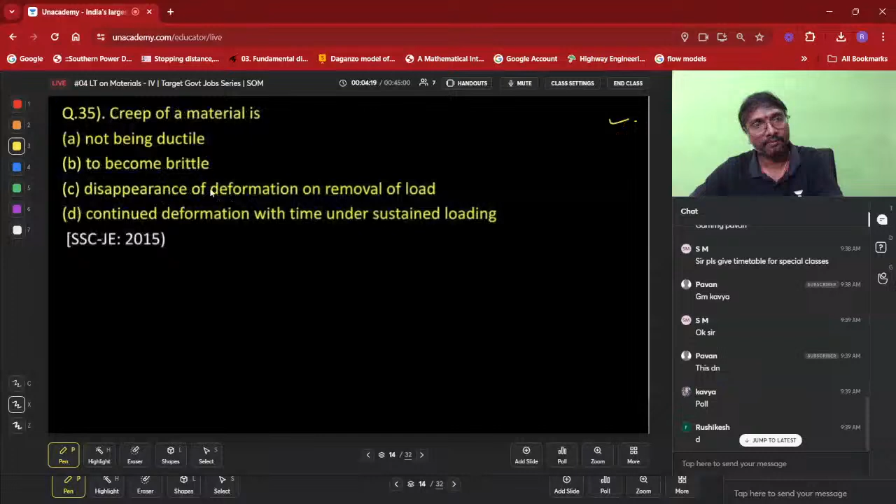So continuous deformation under sustained loading, yes correct, right? So 36th question we will go for. Shall we go for this 36th question, everyone? So we'll go for this 36th question.

Select the answer now. Okay, one second, 30 seconds time I am giving. Select the answer, everyone.

Vaishali, Kavya, Venkatesh, SM, Pavan answered correctly. Anuj from YouTube answered correctly. Yeah.

So what is it? Which of the following is relatively a ductile material: high carbon steel, medium mild steel, cast iron and bronze? Which one you can say is relatively ductile material among all of them? Obviously, isn't it? Now, so next one, right?

Shall I go over to the next question out of here? Select the answer, everyone. Yeah, namaste Aravind. Mild steel, namaste. Okay.

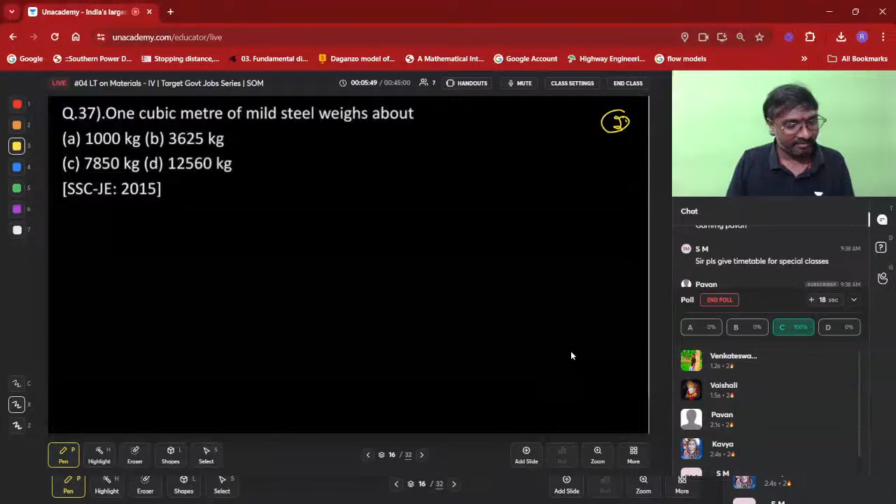Anuj answered correctly. Aravind also answered correctly from YouTube. Venkatesh, Vaishali, Pavan, Kavya, SM answered correctly from Special.

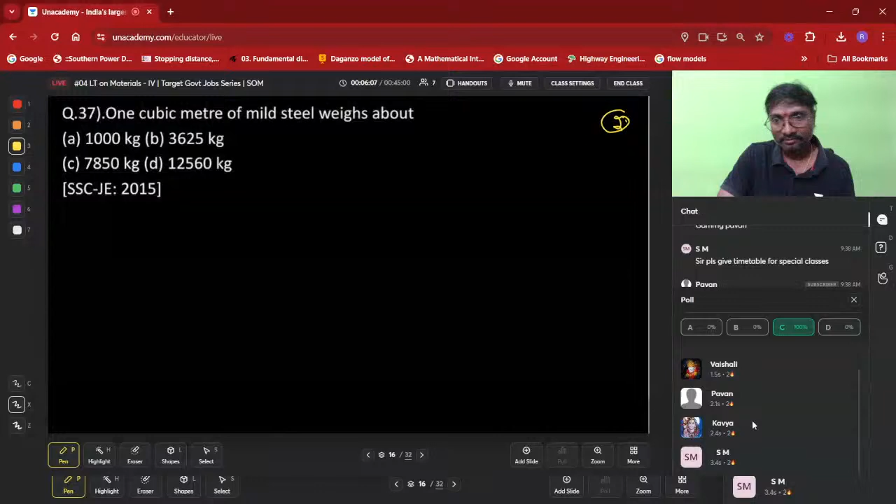Okay, 1 cubic meter of this mild steel weighs about, right? What is it? 1 cubic meter of this?

So I am trying in movies. That's why I am going for an audition.

So mild steel weighs about which one? This is 7850 kg, right? Yes or no, 7850 kg or not? That is your density. So 7850 kg, that rho is nothing but your density. This is 7850 kg per meter cube.

Two subjects means, right. One is highway going on, one is strength of materials going on. But in the highway, that GATE and ESE civil goal is there. In that goal, I am doing GATE questions, ESE questions, state exams, and SSC JE questions. All questions I am doing. And this time only SSC JE and state level questions I am doing. So both are covering all examinations, right?

So 7850 kg per meter cube, or you can also write it as 7.85 gram per cc. 7.85 gram per cc or not, right? You can select it, right?

Now 38th question, shall we go for everyone? Select your answer. 30 seconds time I am giving.

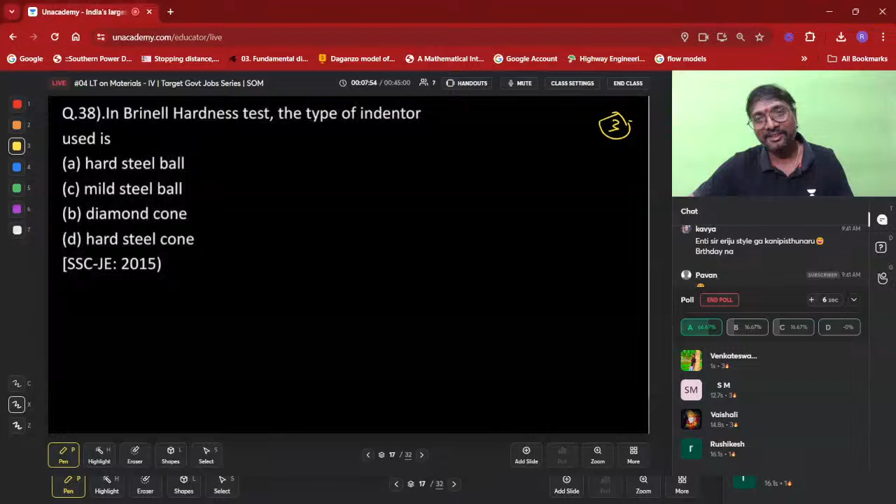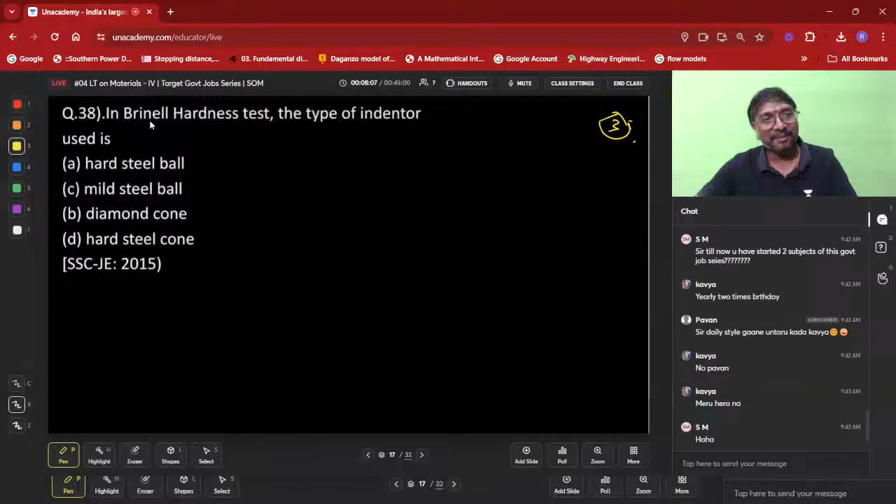Okay, right, this is the leaderboard you are having. You can say in Brinell hardness test, the type of indenter used is, right. The type of indenter used is which one? Brinell hardness test and Rockwell hardness test. Do you remember? These are the hardness tests, you can say.

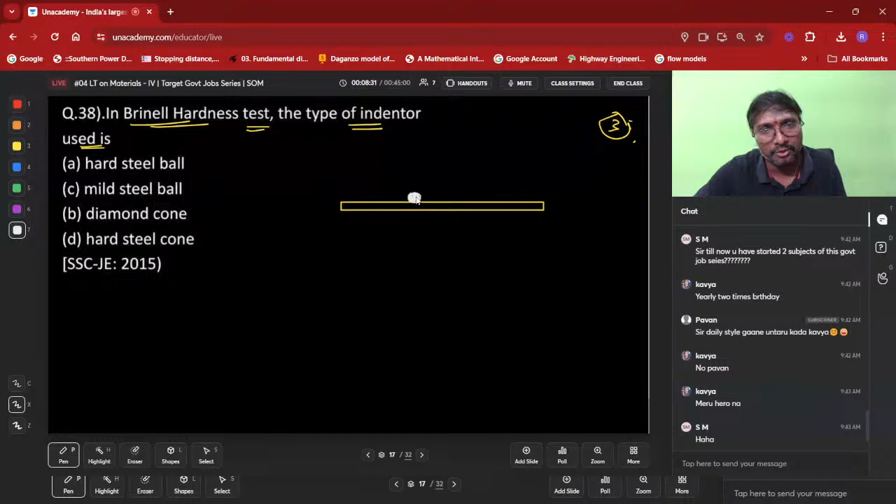So here if you just observe, this is your plate you are having. For this plate, what is it? This kind of spherical ball we are using, or not everyone? So whenever you are using this spherical ball, what is that we will be getting? Depression will be getting like this, na? Some kind of circular depression will be getting. So this is your hard steel ball, right?

Hard steel ball. If you are using this mild steel ball, what will happen? So if that plate is stronger, there is a possibility that ball gets damaged. No, ball should not get damaged, and which one should be subjected to this impression? That plate. So it should be very hard steel ball, definitely, right?

And what is that, Brinell hardness number, you can say yes. So what is the Brinell hardness number equal to? P by surface area, that load, right? Whatever load you are applying, load divided by surface area will be measuring. For this depression, if you just observe, we can measure this surface area or not? We can measure this surface area, you can get it, is it not? So that is your hard steel ball for this Brinell hardness. Yes, correct, right?

So Rockwell, what is that? Tell me. Diamond. But actually in practical, do you use the diamond, or we don't use the diamond mostly, right? That is costly, na? So for Rockwell, we have to use this diamond, but we don't use it. Okay, right, got it? Clear?

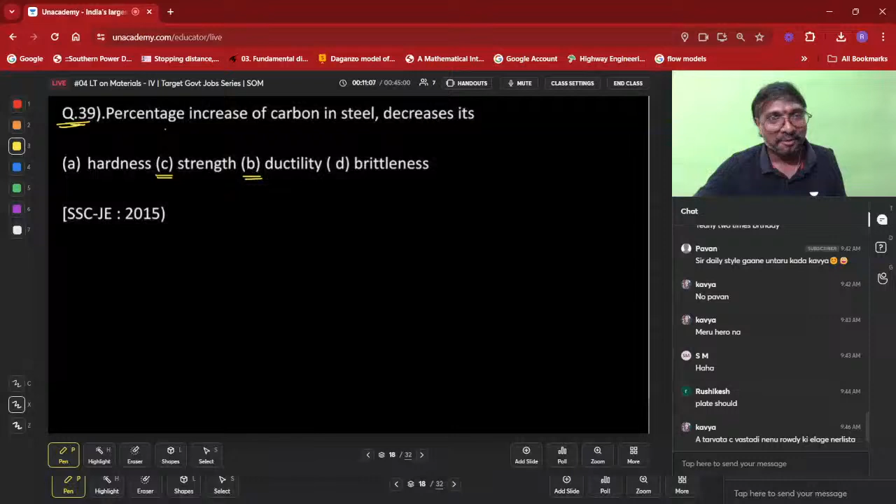Percentage increase of carbon in steel decreases its, right? As this carbon content increases, what will happen? Tell me, strength increases or strength decreases, you can say. Strength increases, na? Strength increases. And what about this ductility, you can say, if you just observe.

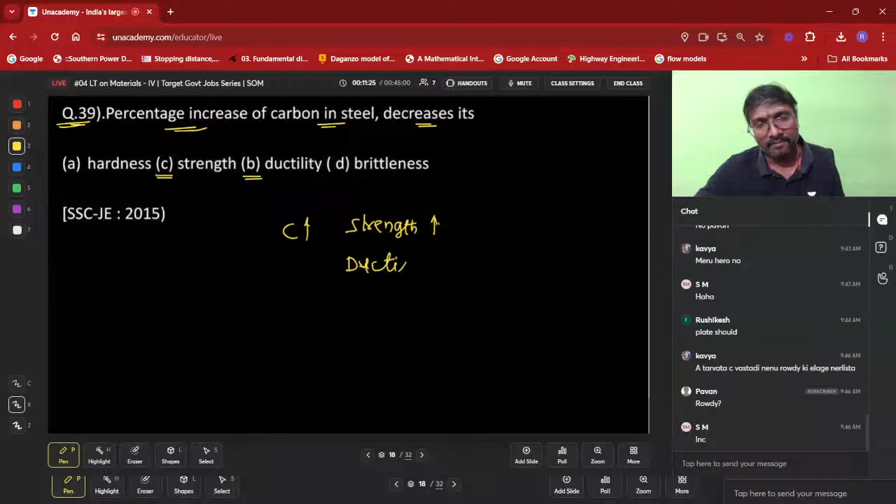What about ductility? Ductility decreases. So what happens to brittleness? Brittleness increases, right? And hardness, what happens to that? Hardness also increases, right? And what else will be there? Tell me.

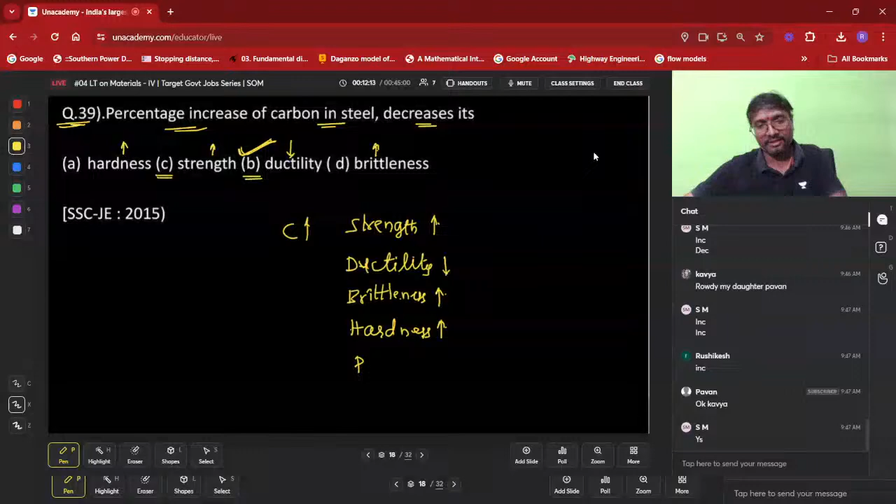Ductility decreases means automatically plastic deformation decreases, right? So as carbon content increases, hardness increases, strength increases, brittleness increases, and ductility only decreases. So which one is it? Option B is the correct answer, you can say it like that. Now shall I move to the next one, the 40th question?

Select your answer. Yes, correct everyone, YouTube and special, everybody answered correctly. Almost 90 plus questions are there in the first chapter itself, previous SSC JE questions, okay? Venkatesh, Rishikesh, SM answered correctly. Don't scold yourself, aspirant, right? Forget values, very good. Venkatesh first, SM second, Vaishali third, right?

Which of the following materials is expected to have the least value of Young's modulus of elasticity? Wood, glass, copper, aluminum, right?

Which one? Young's modulus is least for wood only, no? Because it is the least elastic, isn't it? You wanted me to write these values? Okay, I'll write it at the end, don't worry. Now, because why do we both look similar? We both look similar, okay.

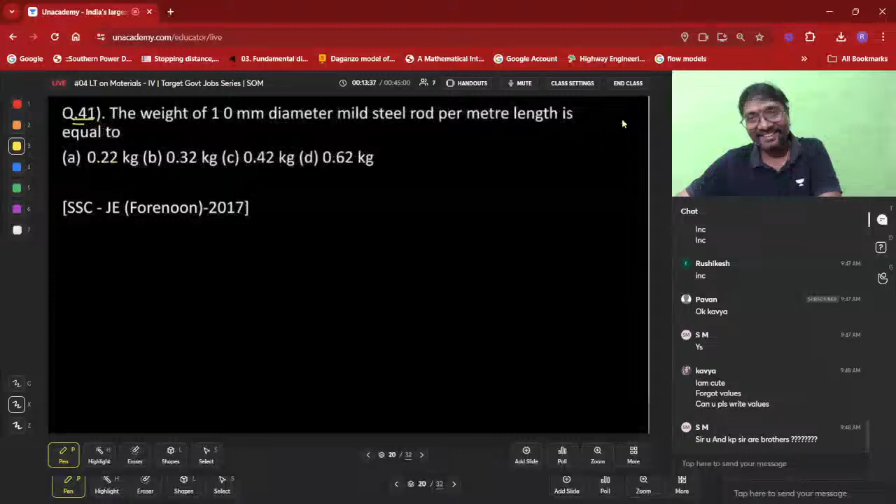Right, so you can call this the 41st question. If you just observe it, I'll be going for this next one. Select the answer.

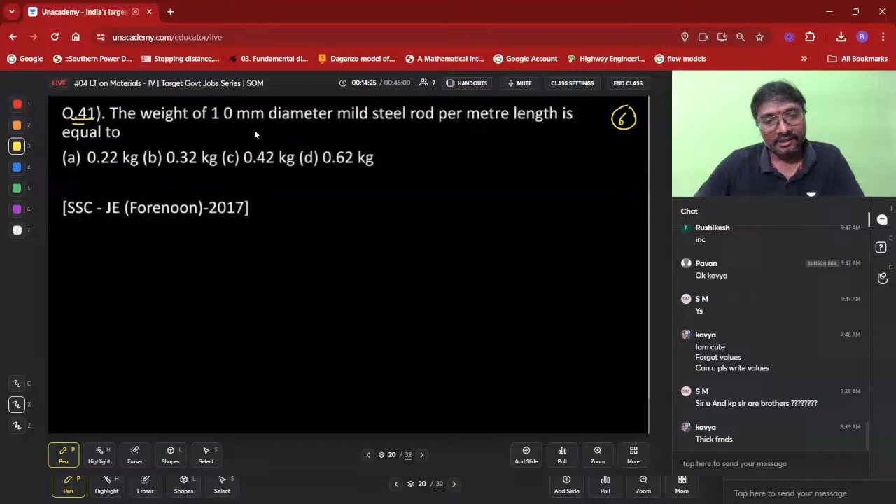Right, this is the leaderboard. Yes, correct. Should I increase it here? I think okay, timer not sufficient or sufficient?

The weight of this, which one? The weight of a 10 millimeter diameter mild steel rod per meter length is equal to, right? Per meter length, what is it? So there are two ways of solving it. What is it? One way, you can say weight is equal to density into volume.

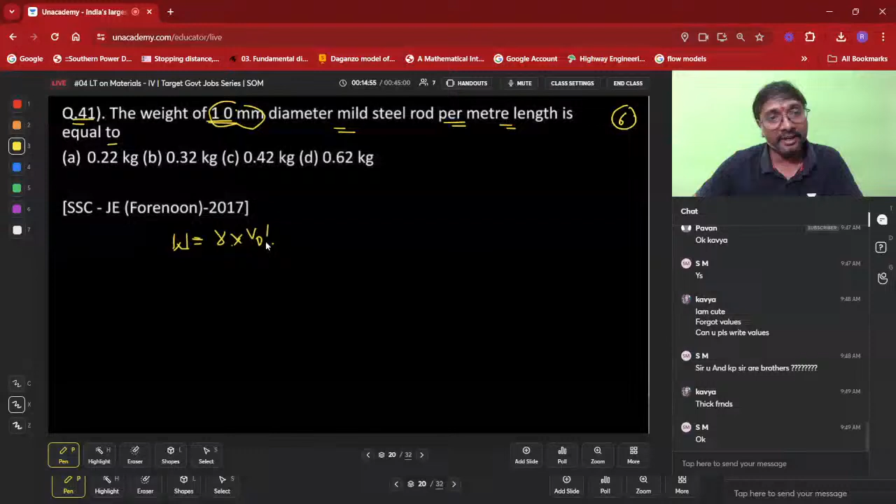What happens to this pen? The weight is equal to density into volume, no? So density into volume is nothing but density into area into length, and that length we have to take as 1, right? So now what is W by L? W by L will be equal to density into area.

So what is the density? If you observe, density of steel is given as 7850, yes or no? 7850 kg per meter cube, into pi by 4 into, what is that area? That is d square, you can say, if you just observe. Isn't it? Is it clear now?

Now here, d you have to substitute in which units? You substitute d in millimeters. So you can multiply it with 10 power minus 6, you can say. So then finally what does it come to be? This weight per unit length, how many kg per meter will you be getting? This many kg per meter you will be getting, right?

So what is it you can say? When you simplify this, except d square, simplify all other terms, how much will you be getting? 7850 into pi by 4 into 10 power minus 6, right? What does it come to be? So that weight per unit length comes to be how much? That is d square by what? Anyone tell me, anyone calculate it?

How much are you getting? 7850 into 10 power minus 6 into pi divided by 4. So what are you getting? 0.0061, right? 1 divided by this answer, if you make it, you are getting 162. So it is d square by 162.12 actually, right?

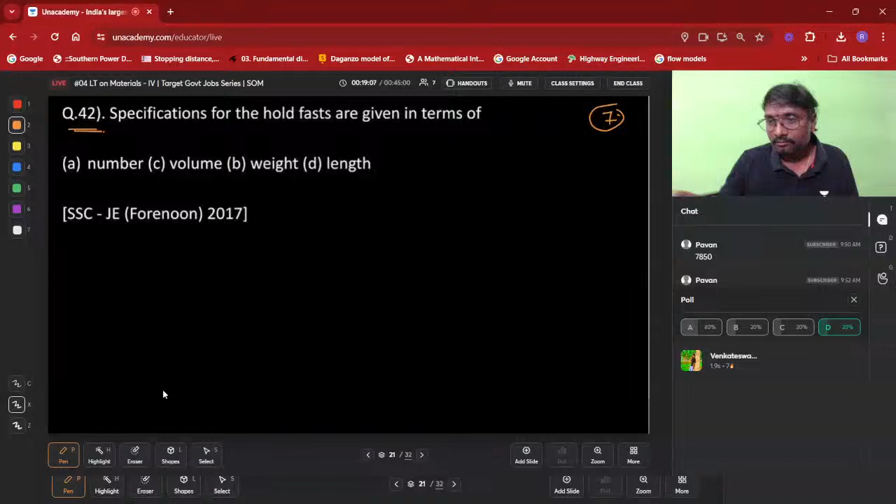Right, okay. So these are all actually little bit questions, right? This is the leaderboard. Specifications for holdfasts are given in terms of which one? This is a number, right? As per which code are we giving this? It is as per IS 7186 code, right? Anybody remember that? Sorry, it is not number, it is length. That number represents the length of the holdfast.

What is the meaning of the length of the holdfast? It is holding, right? So which one? Yeah, D is the answer. Sorry, D is the only correct answer, not number. I was confused with that one. Okay, it is length. It is length only. So what is it that you are having now?

So whenever you have this kind of arrangement, did you observe? We will be holding it, right? We'll be making the bolt holes and keeping bolts, like that. These are your holdfasts, right? These small angle sections are there for placement of platforms like this. These kinds of small elements you'll call holdfasts.

You might be using this at many places, no? You'll be keeping one at this place, and one at this place. Now what is happening? A very big platform-like thing you'll be placing, right? So these are holding it; these are called your holdfasts. Now you got the idea. Whenever you go to a small coffee shop, you'll find these kinds of things. One platform will be there. At the bottom, observe whether the connection is like this or not. Did you observe?

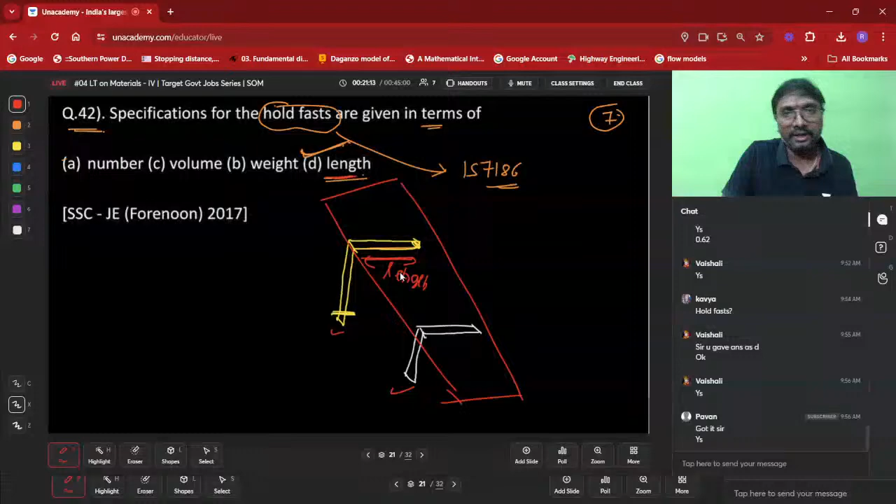So these are represented by which one? It's the length, right? This is your length, and this length is important. Got it now? These are represented by their length. So shall we move on to the next one?

43rd question. Shall we move on, everyone? Try to select the answer. I am giving 45 seconds. Your poll is not starting. One second. Share leaderboard. Where was the leaderboard? Here. One second. Yeah, now the poll started. Select the answer.

Arvind answered correctly. Unique Study also answered correctly. In particular, Venkatesh, Pavan, Vaishali, Kavya answered correctly.

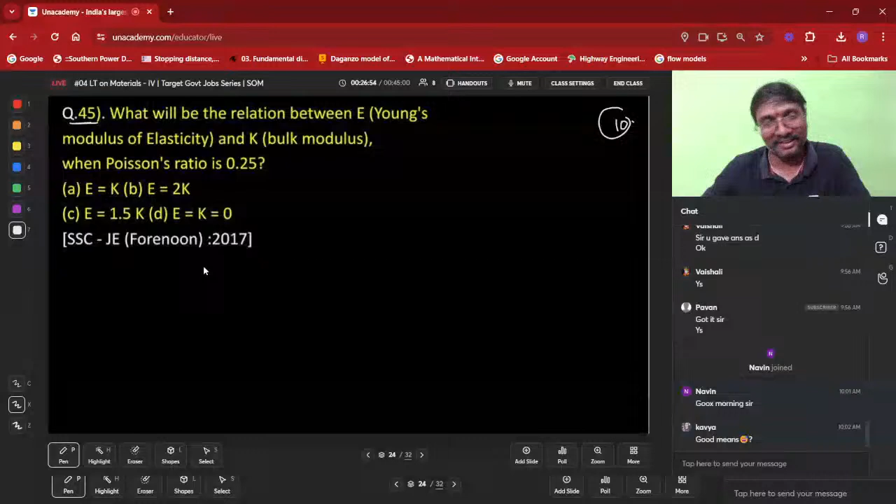So what will be the relation between the modulus of elasticity, Young's modulus E, and bulk modulus when the Poisson's ratio is 0.25? The relation is E = 3K(1 − 2μ).

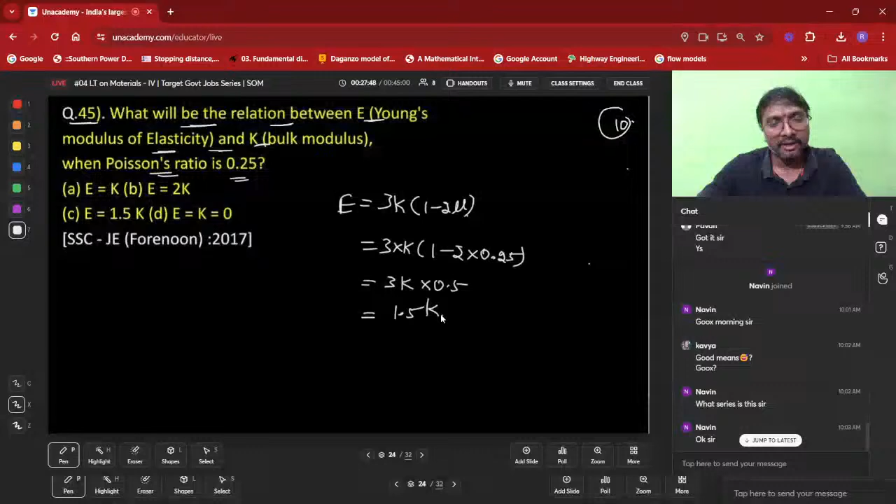So E = 3K(1 − 2μ), where μ is 0.25. So 1 − 0.5 is 0.5, and 3 × 0.5 gives 1.5K. So which option is correct? Option C will be the correct option. Shall we move to the next question? 46th question.

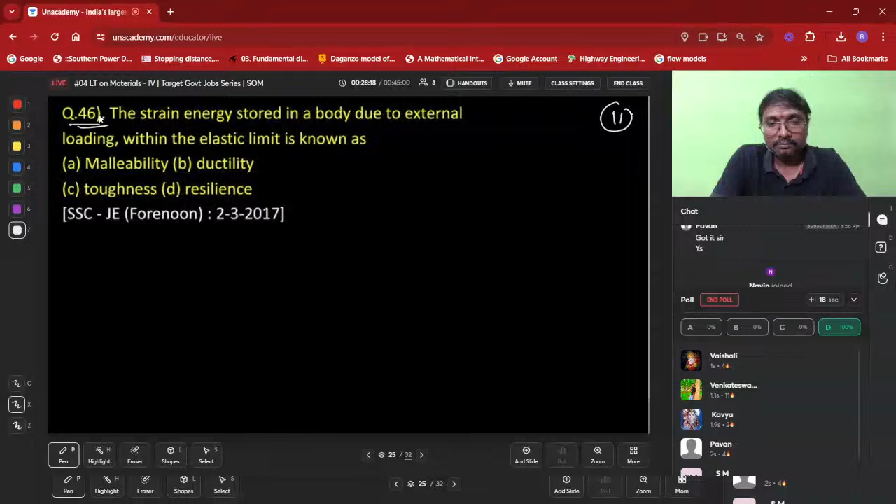The strain energy stored in a body due to external loading within the elastic limit is known as? Within the elastic limit, strain energy stored is called resilience. What is toughness? Is toughness up to the elastic limit or up to failure? It is up to failure.

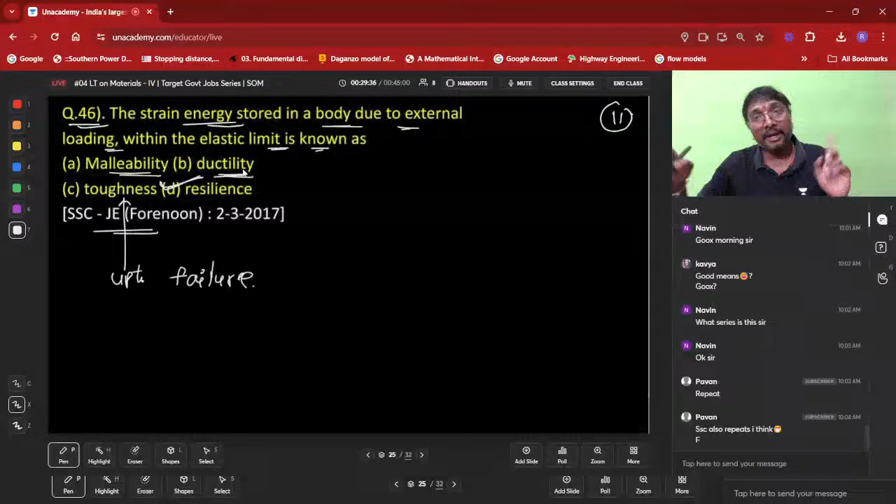So it's not toughness. Resilience is up to the elastic limit only. You have to be careful. Malleability is converting a member into thin sheets by applying compression. Ductility is converting it into thin wires by applying tension.

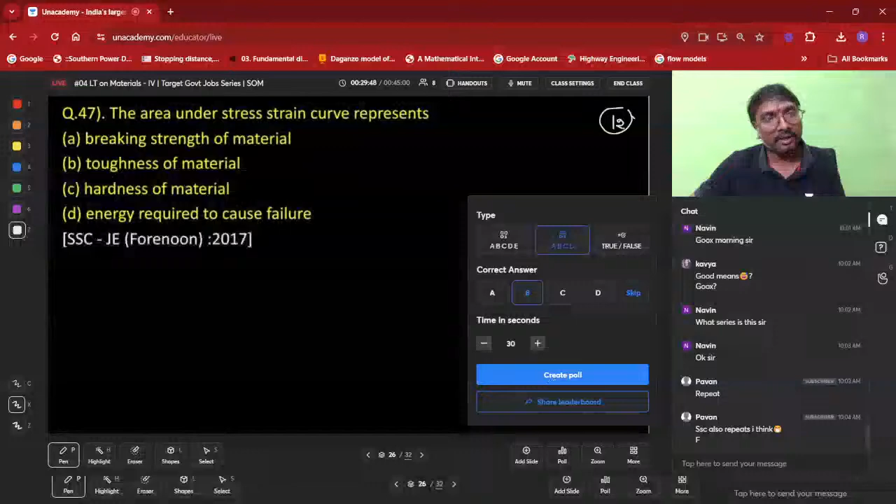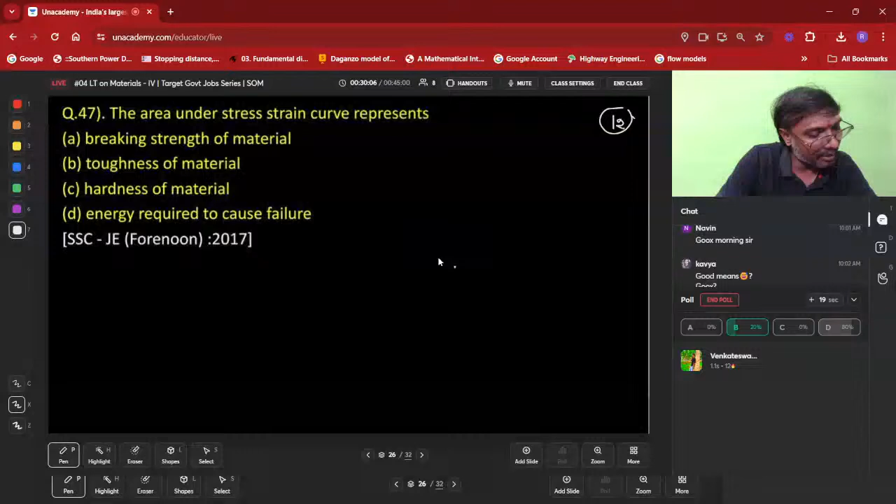Shall we move on to the 47th question? Select your answer. Has your poll not started? One sec. Yeah, poll started now. I don't know why it is becoming like that. Aravind, yes, property of a material showing deformation. Yes, correct. Arvind answered correctly.

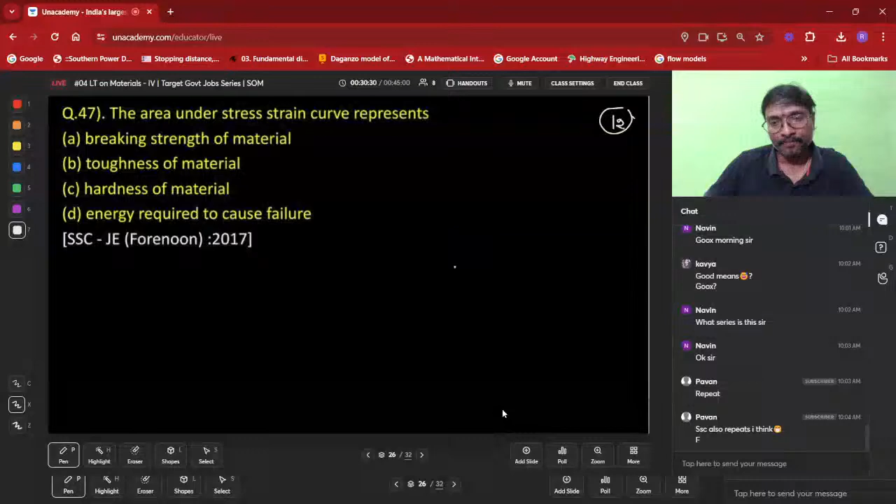Right, this is a leaderboard. Is it not? No. Yeah, toughness of material. The area under this stress-strain curve represents, right? The area under this stress-strain curve means, is it mentioned up to which point? Not mentioned up to which point means that full area we have to consider. It is not mentioned up to the elastic limit or up to the fracture; nothing is mentioned.

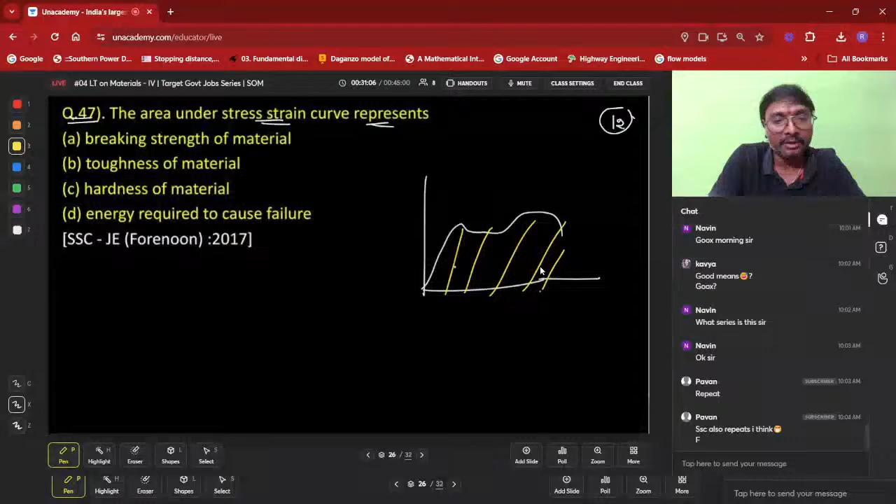When nothing is mentioned, what is it we need to consider? Tell me, what is it we need to consider? We need to consider it up to the fracture if nothing is mentioned, right? Whenever it is up to the fracture, what can you say? This is the one. Up to the fracture means that full area means toughness only. Area under the stress-strain curve is representing what? Strain energy stored, right? Yes, no?

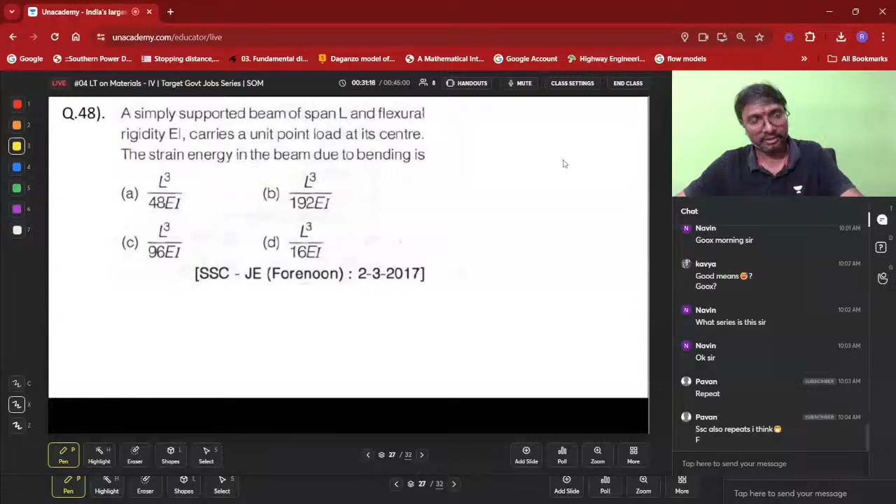So shall we go on to this? This is your 13th slide. Got it? So you have to be careful, very, very careful. Okay. So the answer. Some 90 seconds time I am giving. Try to solve this, everyone.

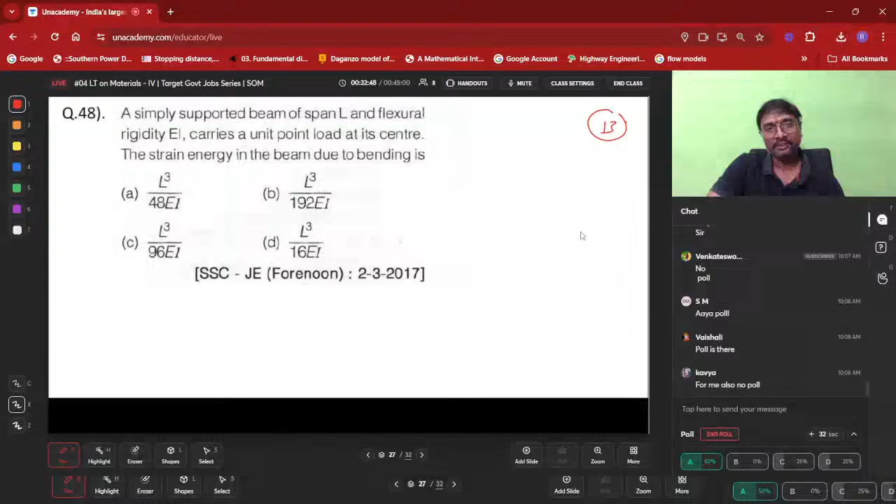Poll is running already. Some people answered, but many people answered wrongly. Ravind, okay. Anuj answered correctly. Ravind, check it. No poll for you all? Here, SM Navin answered correctly. Others answered wrongly. It is not showing. For me it is coming and for me it is not there. You refresh your page, because the poll is already going on.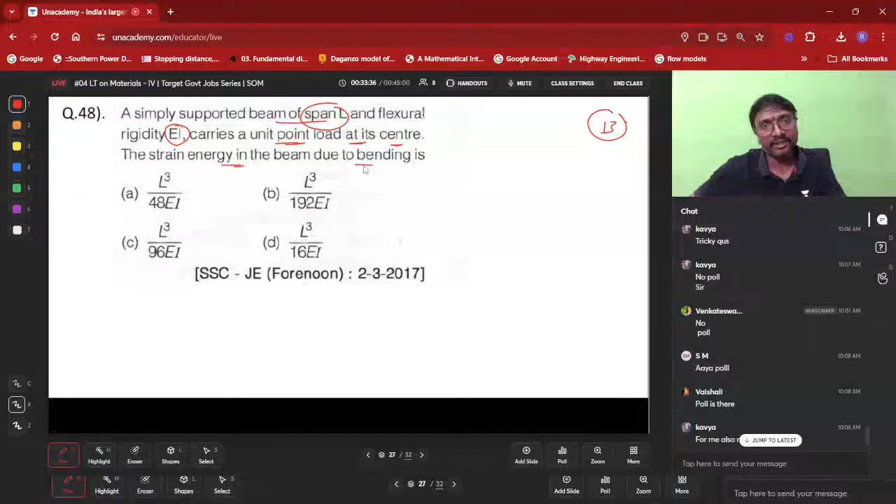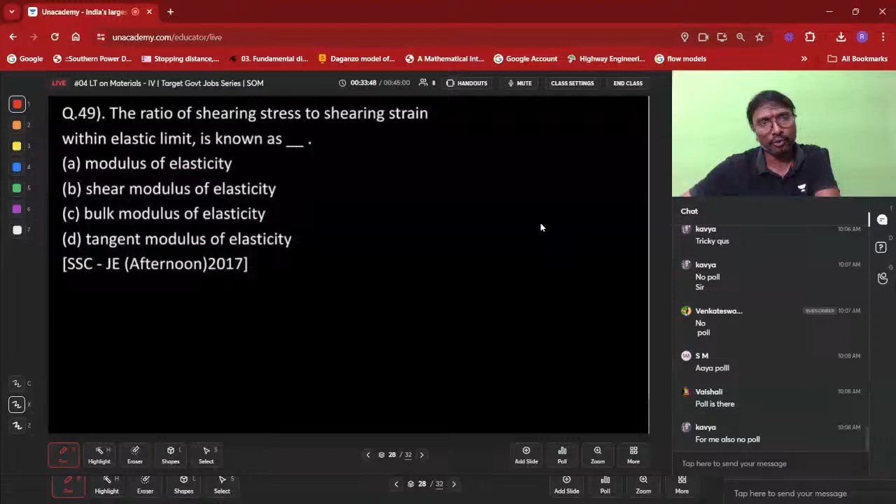Generally, whenever you are having this, we'll check which one is correct. So this is your A, this is your B. What do you have at this place? That unit load is there. That W we have to take as equal to 1 kilonewton. The bending moment diagram is like this. If you do it for this half portion and 2 times for the second half, we'll be getting the same. So this is your section x. What is the Mx? Tell me if you just observe.

The Mx will be equal to which one? Now the reactions will be equal to what? W by 2 or not, all of you? The reactions will be W by 2 and this W by 2 only. So Mx is W by 2 into x. Now, what is the total strain energy?

You can say 2 times integral 0 to L by 2 only. I am considering this left half portion only, 0 to L by 2, because from here to here it is L by 2. The right half is also the same, so I will be multiplying by 2. Into Mx squared dx divided by 2EI.